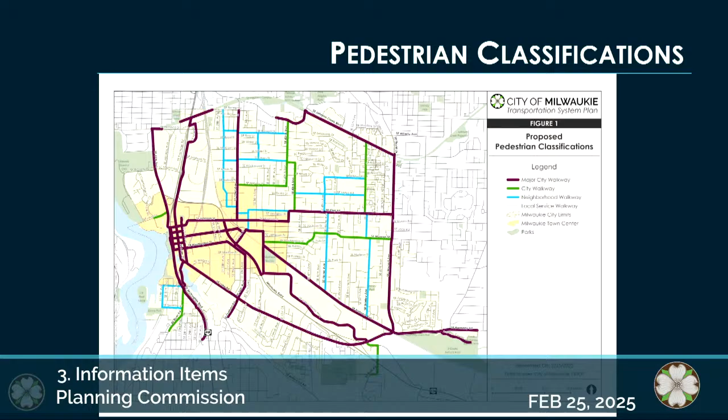I do. I want to say thank you to the city personnel who have been really, really helpful throughout all the process from the very beginning of studying it to organizing every single meeting and presenting all the wonderful reports and everything that you guys do, the work behind the curtains that we just get to see a little piece of. I'm really thankful for the opportunity to serve the community that I live and work and love. And to the fellow commissioners, I appreciate your understanding, your listening, patience, and allowing me to be part of the commission for a little bit. Actually made it to a full year, I think. So it went pretty fast, but yes, a full year pretty much in the commission.

So thank you. Well, thank you again, Ernestina, for your service. Really appreciate it. And look forward to, as you said last time, knowing you'll probably stay involved in a variety of different things and that you're not going anywhere. So whether it's on a different committee or on our children's soccer fields, look forward to seeing you there.

We can move on to audience participation. This is an opportunity to comment on items not on tonight's agenda. Does any audience member in the room or online wish to comment on an item not on the agenda? If you're participating online, you can use the raise your hand feature on Zoom, or you can dial star 9 to indicate you wish to make a comment. Anybody online? We have one person online, but no hands raised. Okay, great.

Well, our first and only agenda item is the work session on the city's transportation system plan. This is an update of the transportation system plan with a focus on existing conditions, needs and gaps, and multimodal classifications. Our planning manager will present some information for discussion, so we can open up our work session and go from there.

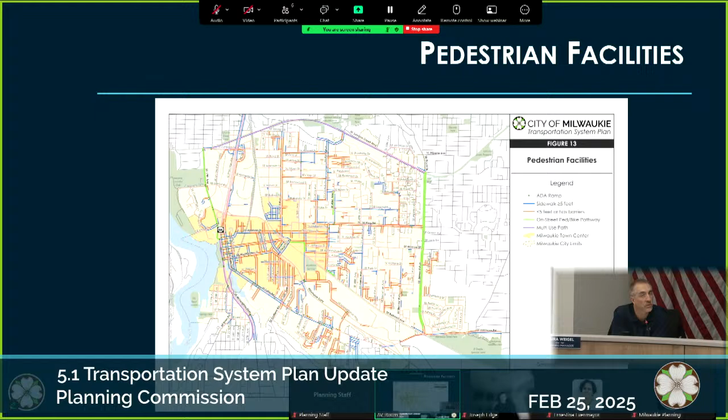And as you can see, there's quite a few roadways and streets in the city that don't have sidewalks. And where you do have sidewalks, it's limited, mainly to your collectors and arterial streets and your newer local streets that were constructed under more recent design standards. But that summarizes the pedestrian facility.

We included just a couple statistics in here that show what that looks like. So this is the percentage of your roadway functional classification designation that have sidewalks greater than 5 feet and that have no barriers. And what do I mean by barriers? That would be a utility pole in the sidewalk or some other obstruction that would prevent someone from easily walking down that sidewalk side by side or using a mobility device.

That would also include all the mailboxes that get put back in. Yeah, so as you can see, there's a pretty small percentage of each of those classifications of streets that have unobstructed sidewalks greater than 5 feet. So while this is a snapshot of what's out there today, I think it's a launching point for how to make this better going forward.

So the idea behind including system completeness in your TSP is to give yourself a measuring stick going forward. So if you set a goal for by 2045 that we want all of our neighborhood routes and collectors to at least be 50% complete, then you can set an aspirational goal like that and have a measurable measure against it. Yeah, exactly.

I won't go into the details here, but this is just the bicycle facilities where you have bike lanes or what we're calling on-street multi-use paths, like what's on Linwood, or buffered bike lanes or just bike lanes or some sort of multi-use pathway. So this shows all of the pathways and bike lanes on the city streets.

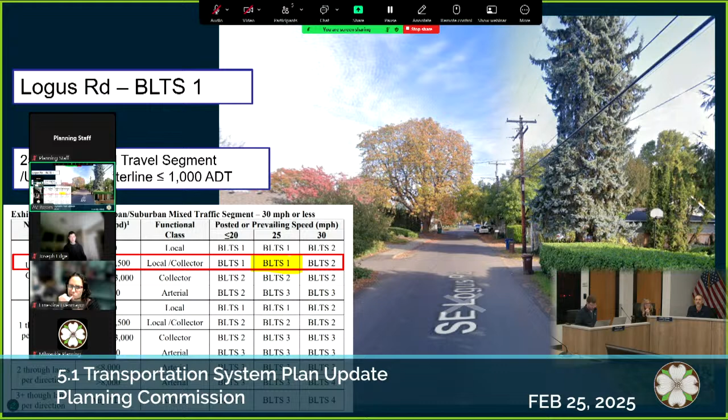So Ryan, if you can maybe move that screen down a little bit. Going back to the map real fast, another question I had when looking at this- you see McLoughlin, Southeast McLoughlin coming south of town, BLTS 4. You see a section of Southeast Johnson Creek Boulevard, BLTS 4, and I agree, they are- I wouldn't get on my bike and ride down them. But you know what I would do instead? I'd get on the Springwater Corridor 50 feet away, or the trolley trail 50 feet away.

And I just worry, does thinking about them as BLTS 4s, which I guess they are, at some point lead us into a weird conversation of like, should we be putting a protected bike lane on McLoughlin Boulevard to improve it to a level 1? That seems like a preposterous conversation because we have a separated multi-use path right on the side. So it's a thought experiment question, but when you look at this map and see how an analysis is going to flow from it, that's where I'm wondering.

Well, if you look really closely at the BLTS map, you'll see we actually did map the Springwater Corridor and the trolley trail adjacent to it. I'm gonna get my new reading glasses. Yeah, you have to get your magnifying glass out, but we do have those.

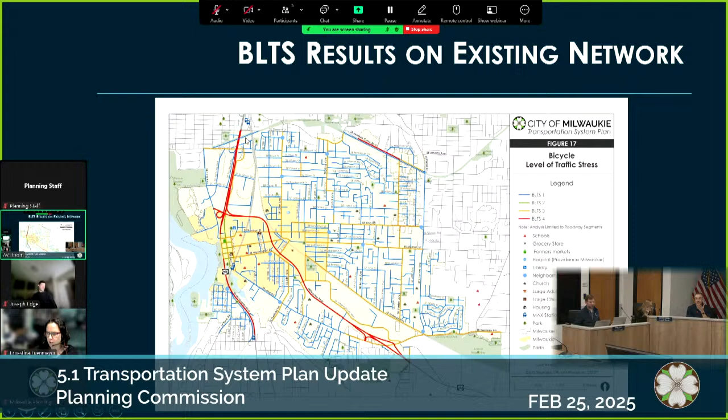Okay, so that's the identified blues right next to it. Okay, great. So that's maybe a lead into the next slide: what does it take to get to BLTS 1 on some of these facilities? Well, it takes a lot. It takes the Springwater Trail and the Springwater Corridor and the trolley trail adjacent to those types of facilities, given the speeds, the volumes, and the uncomfortable, high-stress scenarios. So for those arterials, you've got to put in some really serious separated infrastructure.

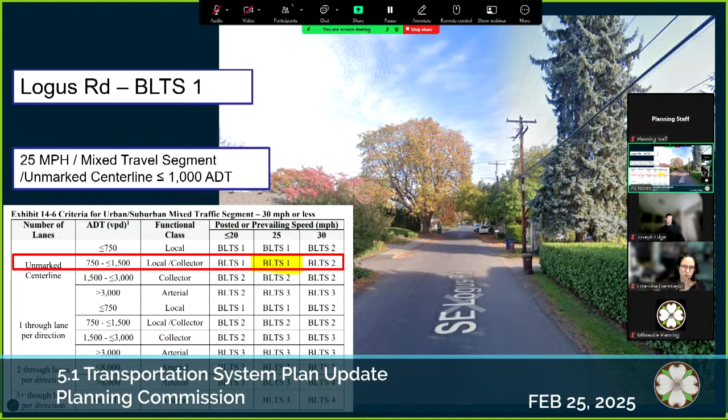But the nice thing is you can get to BLTS 1 on a lot of parallel facilities, like your local streets. Most of those are BLTS 1, and it may seem odd since they don't have bike lanes, but they're low volume—less than 500 to 1,000 vehicles a day in most cases. That methodology gives you a pretty low-stress environment, even without striped bicycle lanes or sharrows on the streets themselves. So you can get to BLTS 1 by relying on your parallel local streets in many situations, which might offset your inability to realistically put that serious infrastructure on some arterials.

And you'll see that in some of the mapping we'll share. I think to your point, Chair Sherman, is that doing a project on 99 or on Johnson Creek isn't going to rise to the top because we already know we have the parallel route. So you're not going to get a project that rises to the top because you've already got the infrastructure there.

But we are saying that those roads themselves, by their classification, don't have any facilities on them. Also, on Johnson Creek Boulevard, when the county comes in and redoes it, we need to think about how that's going to work—it's a dangerous place for bicycles to get across from cross streets, really dangerous. So we want to alert them that this is bad if you're trying to get from the north side to the south side, and things need to be done to improve that experience, but it won't rise to the top of any projects in our list.

Yeah, I'd also say from McLoughlin, we're not going to put those facilities there, but we want the crossings—we want to be able to get into Milwaukie. So by saying, hey, you've got problems on your road, it puts stress on ODOT to make those improvements. That's where we want to focus it.

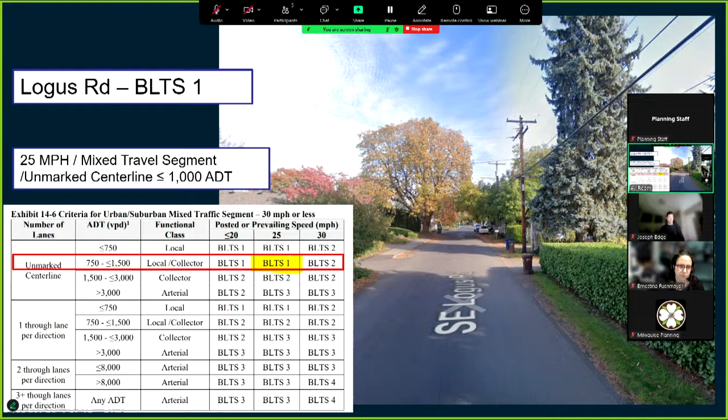And if you go to the next slide—I think we got one more. Nope, sorry, it was on the previous one—but a local road would give you a BLTS 1. So this is just a tool. We've mapped, and with the exception of Lake Road, I think at the moment we're pretty good on most of the map segments for the rest of the city, and we'll use that going forward to help identify projects.

Again, this is a tool, and we'll use it to help identify improvement projects where we're not meeting an aspirational target of PLTS 2 or greater. So, Figure 14 in the packet, approximately page 30. Yep, thank you, I was trying to find it. As we've gone through our committees, I think most of our committees and all of us on the project team believe that a PLTS 2 target is appropriate for the City of Milwaukie.

And so what does it take to get to PLTS 2? These tables on the screen show a lot of different variables, but it's based really on the width of the sidewalk itself, and more importantly, is there an obstruction in that sidewalk? You can have a 10-foot sidewalk, but if it's got obstructions that prevent someone in a wheelchair or mobility device from navigating that sidewalk, it's going to get the PLTS 4 designation. So we got a couple of slides that illustrate that.

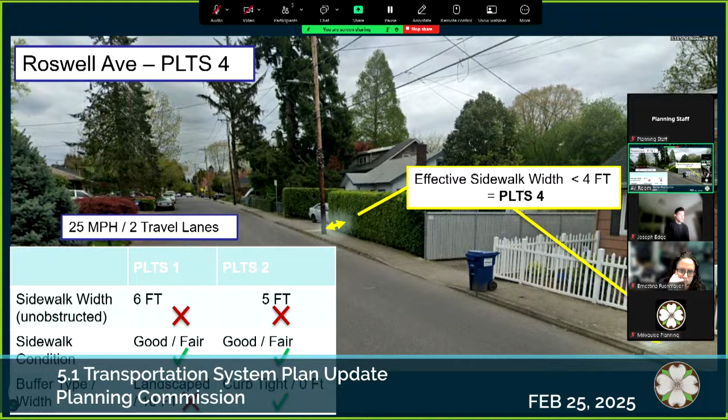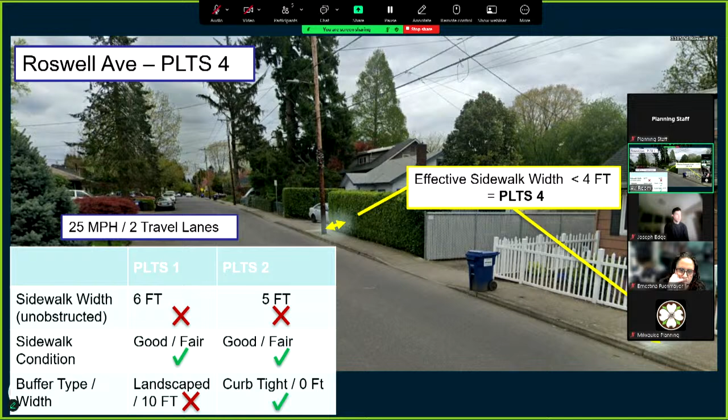Here's a quick map, and the purple colors show a couple of different examples to illustrate that point. This is Roswell, on the north side of town, serving Ardenwald Elementary. It comes off of 32nd, looking east on Roswell. Ardenwald Elementary is off in the distance, you can barely make out some of the frontage of that school. It's got a pretty decent sidewalk, greater than 4 feet, and fairly decent in terms of surface condition. But unfortunately it's got a couple of different barriers in it. So even though it's a 4-foot sidewalk, it has those barriers, and it gets the PLTS 4 designation. Had those barriers not been there, it would be a PLTS 2.

Here's an example of a more recent improvement that engineering staff have just finished up. This is a segment of Monroe, and it's got a pretty wide sidewalk, with a buffer associated with the multi-use pathway right next to it. It also has a landscaping buffer and an on-street parking buffer. That width of the sidewalk plus that buffer separating the pedestrian zone from the adjacent vehicular lanes creates a pretty low stress environment from a walking standpoint. This is a really nice extreme example of a PLTS 1.

Okay, so I kind of rifled through that pretty quickly, but I think we got some good feedback. Any other questions about PLTS and BLTS before we move on? Probably, I might have others when we want to get more detailed, but not at a high level.

Okay, all right, so now we'll transition into the needs. Oh yeah, go ahead, quick question.

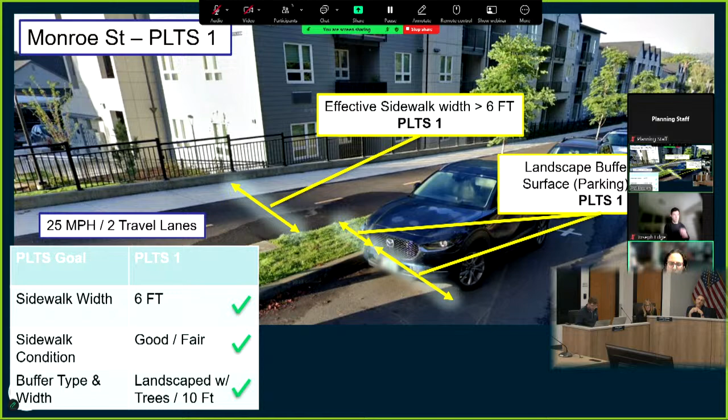Is this also including the projects that are going on right now for the sidewalks that are being improved, or just before the improvement? Like the area where I live, they just made some changes to the sidewalk, improved some areas. They're doing some new sidewalks that are actually the same width rather than expanding it. But there's some changes around Washington Street and near Oak. So are those kinds of improvements included into this map, those changes for the level of pedestrian stress?

No, the current projects aren't included in that list because they're not completed yet. Unless the concrete got poured last night, it's as updated as it's going to get. So it's just existing conditions. Did it get poured that night? They did get poured last night, actually. Washington hasn't been added. Yeah, anything that's under construction right now is not included in these maps. That's fine, that's good.

Okay, all right, so the bike and ped needs and gaps analysis. I'll start this section with something I alluded to earlier: one of the things we identified early on is we needed some way to help prioritize the different geographies of the city. Part of that is due to the new planning rules the state of Oregon has adopted, where they want a lot more emphasis on equity and serving underserved population groups. As we noted earlier in the community profile, Milwaukie is pretty unique in that it's fairly homogeneous from an income, demographic, and race perspective. There's not defined and concentrated pockets of certain profiles. So that presents some challenges, and it also gives us some ability to be unique in our planning process. So how do we get around that nuance?

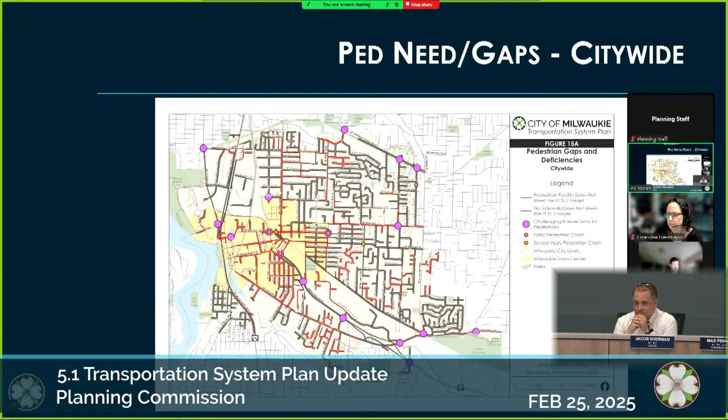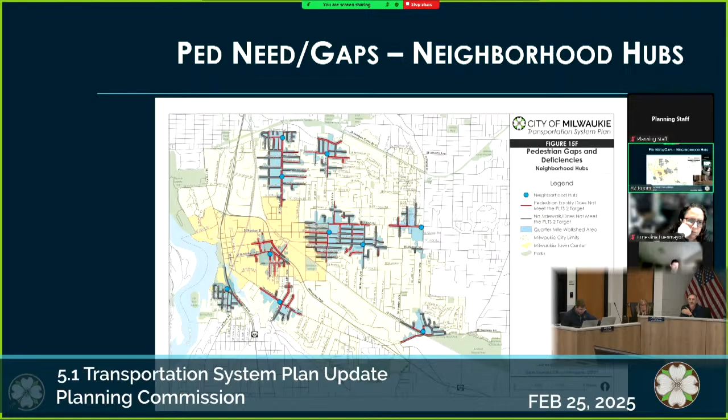The next one, these are grocery stores and shopping centers, the two big ones. We didn't include all the little smaller corner stores, but the big ones. These are the neighborhood hubs, the defined neighborhood hubs that the city staff has been working with the community on.

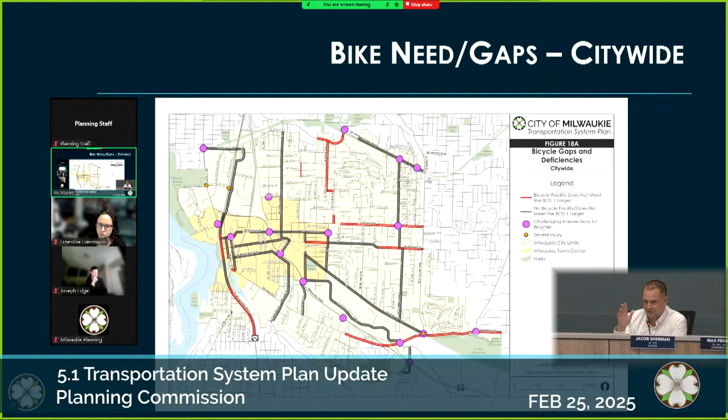Any planning commissioners have any questions on this? Because I'm assuming we're going to pivot to another topic next.

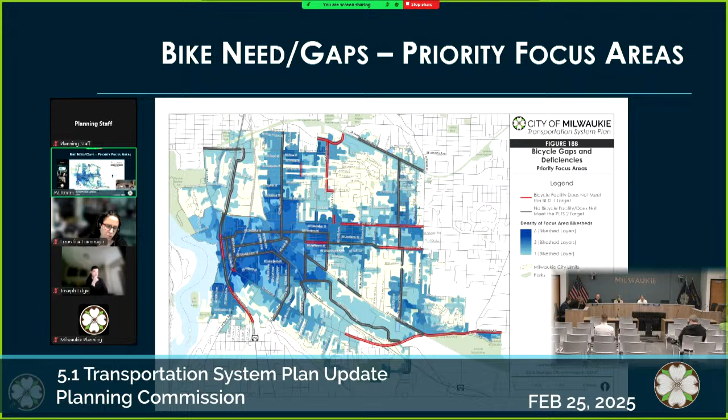All right, great. So that was a sneak peek, a really quick overview of how we identified needs and gaps on the network from the bicycle and pedestrian perspective. But we also know this is a multimodal TSP, so how did we deal with the vehicular and freight components?

That was a lot of different things that went into it. So we had a handful of intersections where we took a deeper dive into the operations of those intersections, looking at traffic volumes during peak time periods and assessing the adequacy of those intersections from a capacity or level of service standpoint.

I think most of the effort went into really just reviewing your existing TSP. It's still a functioning TSP, not out of date by any means in terms of the project list. A lot of those projects are still unconstructed on there. Doesn't mean that they're bad projects - they just didn't rise to the level of funding at the moment, but we started with those projects and tried to reassess the validity of those going forward into this next round of update.

And then we gathered feedback from city staff and our committees to help refine that. So these next several slides are really just kind of blank slides, but we overlaid on them a lot of what we heard back through our own research of your existing TSP and the feedback we got from our committees and city planning and engineering staff.

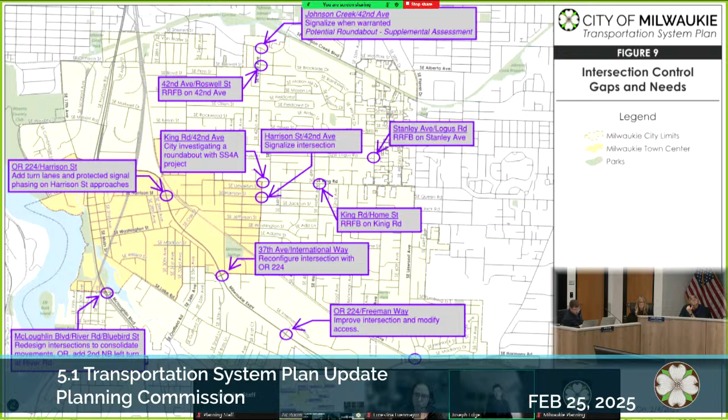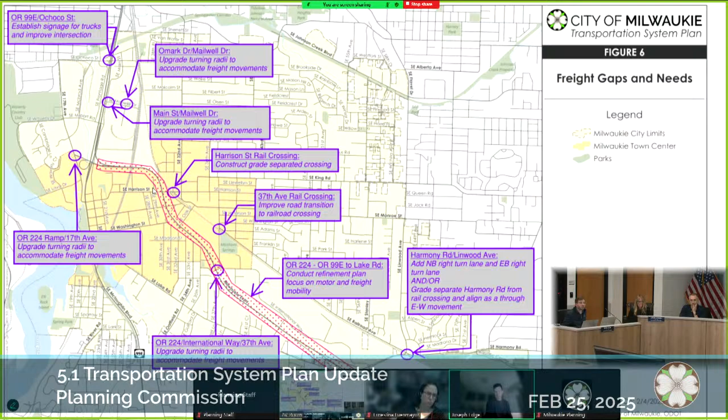Yeah, thank you, Chair. I wasn't sure if this was the right time to bring this up, but I did relay some questions to staff, or at least signal that I was interested in these two maps that we just looked at, because on each map there's three suggested solutions that kind of correlate with each other on the other map. So we have the rail crossing at Harrison. We also have the Harrison at 224 intersection, if you go to the next map. And then we have the two on 37th, at the same railroad and expressway intersection - those are a little further spaced apart. And then we have the Harmony Linwood railroad intersection and rail crossing as well.

But in particular the first and the third of those, because really 37th is pretty far spaced there from the railroad - the expressway and the railroad are kind of far spaced. But what are the implications of doing these projects? And particularly when you're talking about grade separating rail crossings, which maybe wasn't suggested for 37th, but I've seen kind of a suggestion of dead ending 37th at the expressway, for instance, rather than reconfiguring the intersection. So just kind of curious, what are the implications of these solutions?

And I can get into more detail on what my questions are, but these are big projects, particularly the Harrison and Harmony solutions, and so these warrant like a pretty big planning effort each of them, I think, in terms of trying to determine impacts and the solutions. And I'll call this out just as the scale of my concern here - to put that in perspective, when we were talking about routing, trying to tie the 29th Avenue Greenway to the central Milwaukie bikeway connection, basically we had come before the planning commission before, and there was some ambiguity about the right route, what route we should recommend, and what route would be adopted.

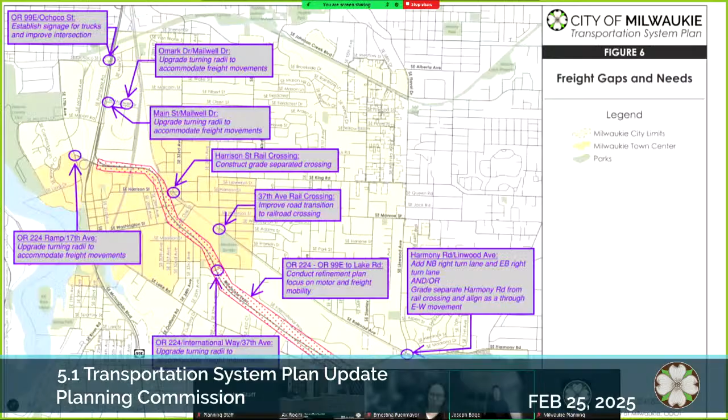But Joseph, I didn't know if you had anything else on the topic, or staff or the consulting team does. No, nothing specific. It's just, these look so innocuous, right, with just little circles with a little call-out box, and it's not even a complete sentence suggesting a solution.

But the impacts are substantial for a few of these in particular. And so it's not that we don't want to recommend it, it makes sense, right? This is a need or a gap that gets called out.

I guess what I'm worried about is what are the implications of having too much in the plan, because I think what matters in terms of what we can charge for SDCs is what goes in our constrained list. Is it what goes into the financially constrained project list, or is it the CIP?

No, people are nodding their heads yes, in terms of the financially constrained list. Financially constrained list, right? Okay, great. So we can have some pie-in-the-sky projects on here, and they're not going to be in the financially constrained list, so it's not really going to have an impact on anything. Okay, well that alleviates a little bit of my concern then.

Yeah, and I guess I'll say, I see the confusion coming out. These call-out boxes have some implied solution to them, and I don't think that was the intent, to pick out the solution. I think what we were trying to do is recognize that the energy going into this TSP from a grant funding perspective is mostly on the bike and ped perspective, but we also don't want to lose sight of the other important modes in the city.

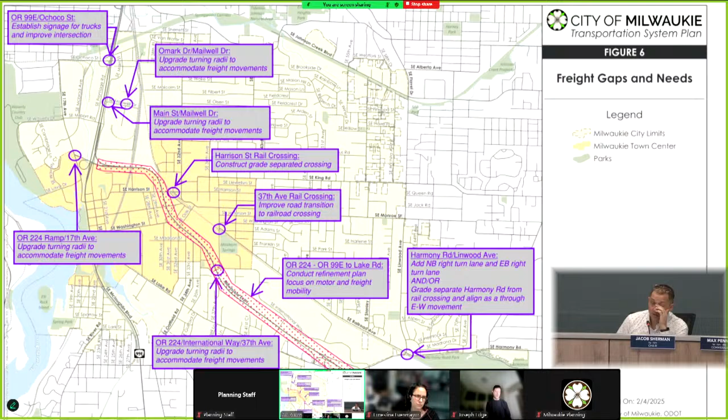Did have a question on the next slide, of intersection control gaps and needs. Elsewhere in our suite of documents, which you all worked so hard to prepare, I think in our transit section we might have identified potential bus rapid transit lines. I was curious, and maybe it's just worth a flag: how does potential roundabouts at 42nd and Johnson Creek, as well as potential roundabout at 42nd and King Road, work with potential bus rapid transit? Maybe the bus could actually move through it more efficiently.

I was just thinking about like the FX bus, if we were to ever have a Portland style FX, which maybe we wouldn't, but a bigger bus moving through a roundabout, just physically moving through the space. I guess it'd be worth talking to TriMet about what kind of bus you were envisioning going through here, and whether there'd be any implications for how we'd design the roundabout. But it sounds like Jen's been thinking about it. Yeah, and that would be part of design. That's a major transit line for us and we want to get that bus through efficiently. So getting rid of the four-way stop and putting in the roundabout will be better. Great, and completely mountable, so it's fine for that too. Sounds good, that was my question.

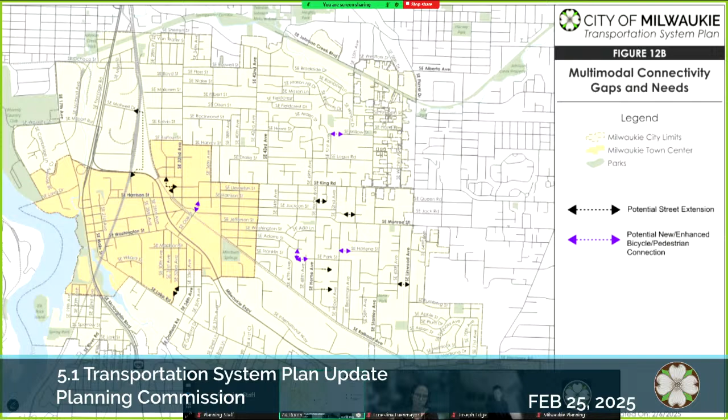I was really excited to see the bike ped connection by Lewelling Elementary, kind of right off of Willow Street, in the center top of the map. One thing I wanted to note—maybe think about extending the line further to the west. There's an alley that people use all the time as a bike and walking path. It's gravel, not the greatest to ride bikes on, but maybe there's a multi-use path opportunity there, a short stretch of asphalt, and it would probably be really cool.

I think it would be really cool because if we go to the bike functional map later on, it actually would make some really interesting connections in that part of the neighborhood. And then I'll get off my soapbox, but the last one—it's in the existing transportation system plan as a bike ped connection—either at Olsen or Kelvin, crossing over the railroad tracks to Mailwell. Maybe that's too hard to think about. It's in the TSP as an overhead crossing. Does it have to be?

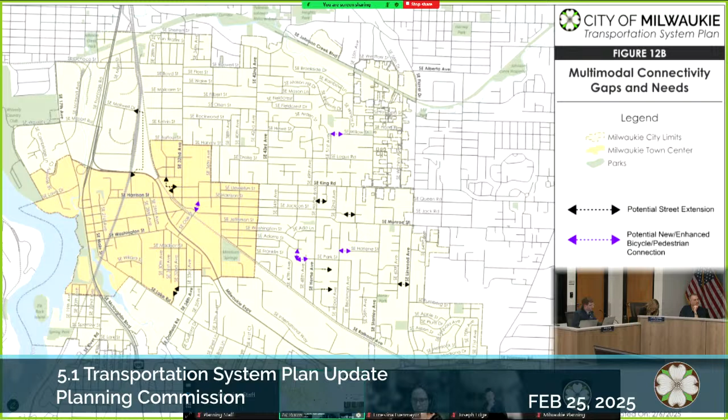It can't be at grade? Maybe. The reality is it's currently an at-grade crossing, and people use it all the time. I've used it myself—from that portion of Ardenwald you can get downtown so fast by hopping the tracks. If it was just a little safer with an at-grade crossing... With those railroad folks, I know, but I understand the point. It probably doesn't have a current rail order, so I don't know, I'm not the engineer, but it's in the existing TSP. I'd love to see it carry forward. I talked to a friend of mine who's a railroad engineer, and his quick back-of-the-napkin estimate was you could do that whole project for $500,000, at grade. I agree.

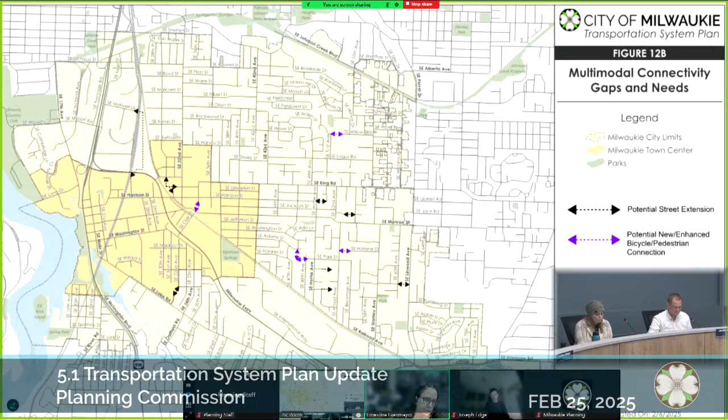I have one more area that people use all the time. If you go into 35th Avenue, just before getting to the one at the park that kind of seems to end nowhere, there's a street on the left of 35th Avenue, on the south side of the Milwaukie Expressway. A lot of people use that street to get to the crossing and cross the highway right at the very end of the center. I don't know if you can see what I'm talking about—it's a pedestrian extension. Maybe if you go from Lake Road to 35th Avenue, go up, and then the first right street...

Right from there—so drop down to Lake and 35th, okay? Yes, go up, and then you see the first street that turns to the right. Oh yeah, the lower one that doesn't have an end. Yeah, that one—it actually connects, and people use that all the time to take the bus, walk from there, cross the street, and catch the bus stop on the other side. They use that crossing to get to the other side of the highway. Is that ODOT right of way? It's a weird little spot, has a kind of sidewalk in there—you have to jump in between blackberries and stuff, but people use it all the time to get through. Is that Worcester Street? I don't know the name of that street. I think it's Worcester Street.

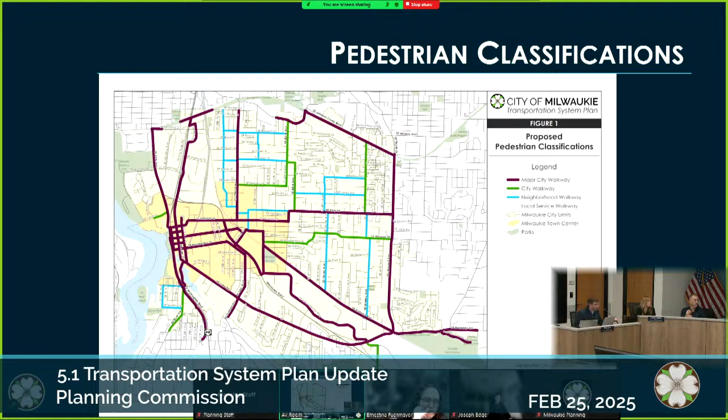Small mapping thing I was thinking about is when are we showing facilities outside of our jurisdiction and when are we not? It does kind of vary here and there. I'll even point out on this map Linwood north of King Road is mapped, sections of the Springwater corridor are not mapped, so there's a consistency question there. And I appreciate that Linwood's mapped, it makes sense for it to be mapped, but it also begs the question of why other things are not mapped.

Yeah, I think we had largely made the decision not to map things outside of our jurisdiction, but Linwood is clearly mapped here. And I understand why you did, and it should be there, I think. Maybe you should have another legend in there that says out of jurisdiction when you're using those lines.

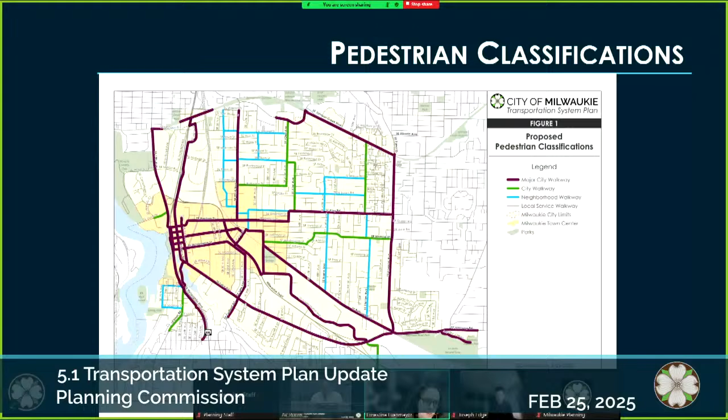Yeah, well it's unclear why the south part of the Milwaukie Highway is a walkway, like along... No, I think, Ernestine, are you talking about what Joseph brought up at the start? Yes, very beginning, yes, I saw it because I literally live near that. So the walkway that would be along 224, there are sidewalks there. I think it's in recognition, not maybe along that whole stretch, but there are stretches of sidewalk there.

For us it came down to, I think, two things. One, it's recognized in the regional transportation plan as a walkway. And second, this is just such a crucial area related to some of the points brought up by Commissioner Edge. Crossing in this area is a huge deal, there are a lot of key destinations for folks. And it's in our town center, which is really intended to be a denser, walkable environment. So in recognition of those things, we wanted to show it as a major city walkway, even acknowledging that it's a really challenging area right now for pedestrians.

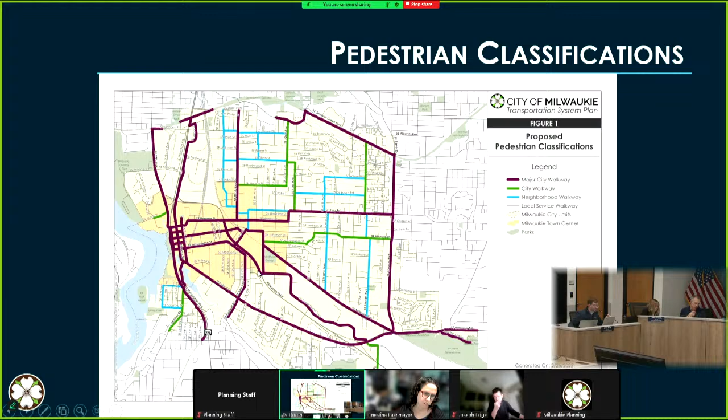Why is that map like that? I think there's a plan ODOT is doing to improve some intersection in there, and maybe in the future there might be some kind of improvement into the area.

Pietro's is moving closer by, so people will be going there more often. But I feel like there's some kind of future consideration needed. Maybe it's something you could add to your legend for that. It might make it less confusing.

Thanks, Ernestine. Commissioner Fuenmayor, I appreciate you bringing it up. If we're mapping it to help justify improvements at Southeast 37th, maybe we should just end it there. I don't know if there'd be concerns about showing a walkway on the shoulder of 224 that would be a major city walkway and would probably be a bridge to nowhere.

That's kind of the question, because I remember when I just moved here, I looked at a map to figure out how to get from places because we had only one car. With my kid, my husband said, 'you guys can walk here,' and he started walking. He said, 'there is nowhere to walk, you can't get out of here.' So it's hard when you're new to the area and you get a map and look at it thinking this is a walkable space, but it's rather not.

And you find yourself walking miles to get from one area to another just because you really can't get there, or you're in a dangerous situation where you put your life at risk, especially there, because the cars are going so fast.

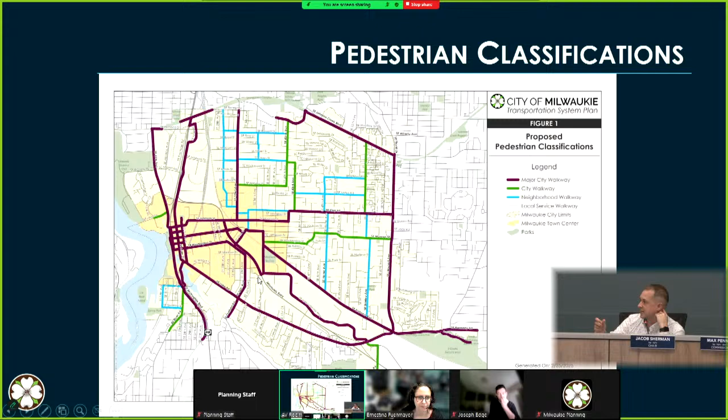Maybe you could spend a little time thinking about some of the connectivity there. Point taken. Appreciate the questions there, Commissioner.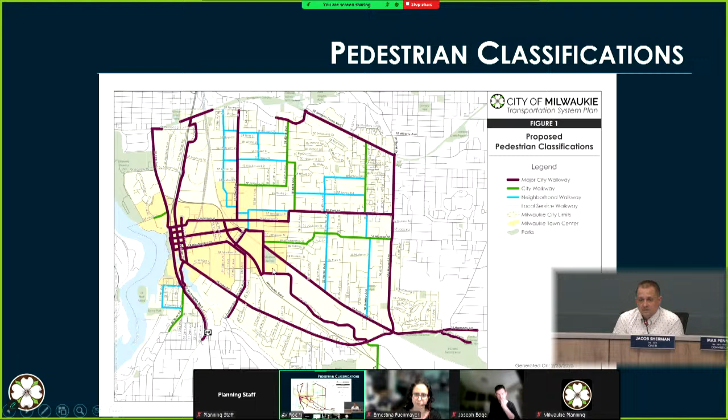Ready for bicycles? Round two. Yeah, so we're proposing a similar hierarchy here.

Any comments, questions, concerns? I know Commissioner Edge — I probably don't have any. I think we can move on. It's amazing. Okay, Vice Chair.

Thank you, Chair. The only thing I'm seeing here, again, is I'd really like to see us try to bridge these barriers, kind of formalize these major geographic or built barriers, to connect these islands. Freeman is a great example — just logically, I want to see another major city bikeway, north-south connection somewhere.

I don't know what makes sense, but to try to get from the middle of the city, the actual central geographic center, to the south, to the southern neighborhoods on Lake Road, and provide a connection across there — it's so challenging to do, but it seems like it would be a smart connection to be able to provide.

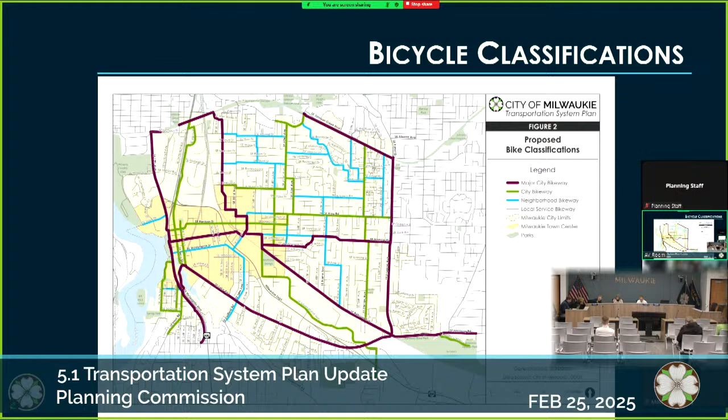Like Harrison and 40th is one of ours. That is—having ridden that on a Bike Milwaukie ride with my kids, the only way we did that was getting a bunch of people out in the street to stop the cars. And I know there's traffic and automobile safety concerns there as well.

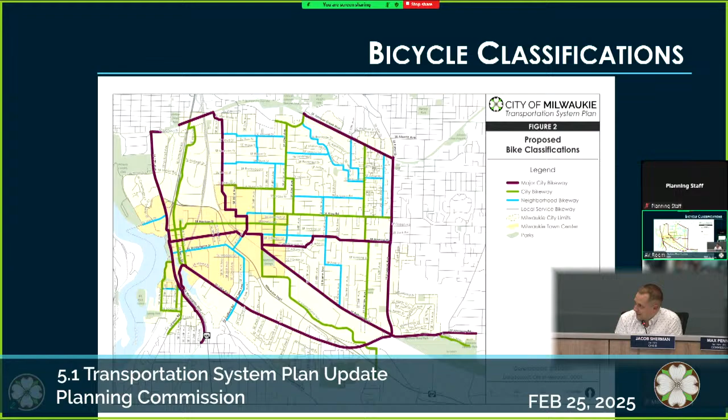Can I ask maybe a provocative question? No, Ryan's shaking his head no. I know this proposed bike classifications map is reflective of our former bike map and various versions of it, which, as I've talked to longtime Milwaukeeans interested in cycling, was a bit of a hasty exercise—when we were working on our TSP in the late aughts or early 2010s, biking wasn't really even included, people advocated hard, and a map got thrown together fast, and now that's what we're building a system off of. So are there things on this map that maybe shouldn't be here, as we think about the challenges of the street grid and how it's being used? Again, I know that's a provocative question, but felt like asking.

Did you have something in mind? I know that as I've heard people advocating for changes, Stanley, north of King, has been a topic that's come up because of all the constraints. It's really challenging, and I don't want to be the one to take something off a map, but at the same time, if it's not going to see improvement and there are other potential connections nearby, I'm curious to hear how you all are thinking about some of these topics.

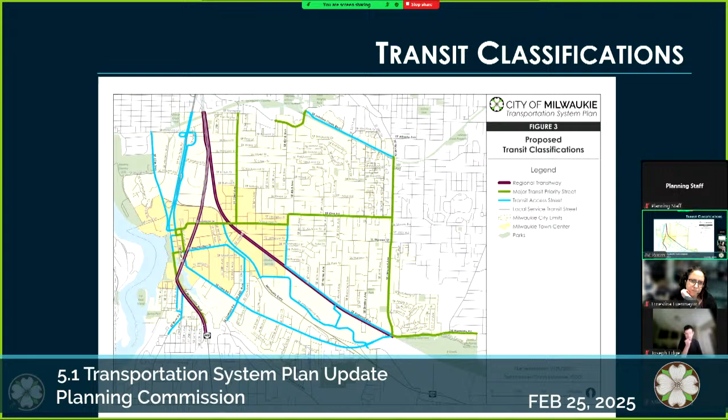I think the only comment I have is that 99E south of the city here has been deprioritized by Metro and ODOT for freight. The idea is that they'd prefer to see freight on 224, so that's been downgraded from a regional truckway to a priority truckway in our plan.

What's the implication of that? Like, lane widths and turning radius improvements wouldn't necessarily be occurring on McLoughlin? I think it's more about the type of truck cargo. Like the Wes facility, the reason that bridge was paid into was so they could make a left to get on the expressway down to Tri-Cities instead of going down 99E.

Yeah, I suspect those would be the implications. From experience working in other communities, when you get into what ODOT calls high, wide, and heavy oversized loads, they won't even direct them to 99E. They don't do it today, and they won't be doing it in the future. They'll be putting them to facilities that can accommodate them, such as 224.